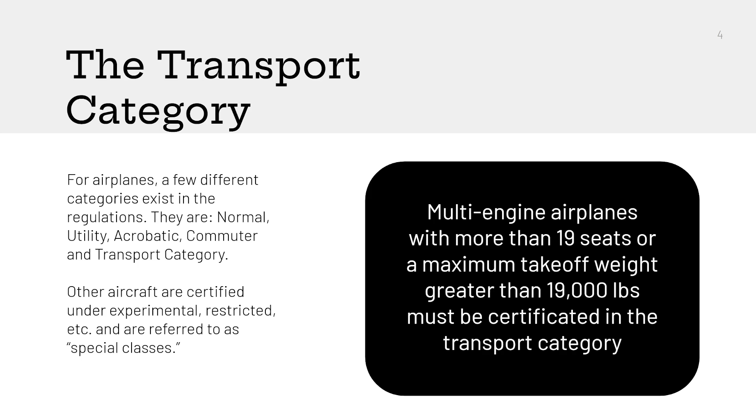So the typical airline transport airplane that you would see follows these guidelines and are certified under the transport category.

So specifically talking about takeoff warning systems itself. If we examine Part 25 and go to 703, this was specifically added to Part 25 around 1978. That was the docket number.

A little bit about it: a takeoff warning system must be installed and must meet the following requirements in order for an aircraft to be certified under the transport category, or 25.

The system must provide the pilots an aural warning that is automatically activated during the initial portion of the takeoff roll if the airplane is in a configuration, including any of the following, that would not allow for a safe takeoff: wing flaps or leading edge devices, such as slats - I think there's also manual flaps in the front in some airplanes - or leading edge devices that are not within the approved range of takeoff positions.

Number 2: wing spoilers, except lateral control spoilers meeting the requirements of 25.671. Speed brakes or longitudinal trim devices are not in a position that would allow for a safe takeoff. And 25.671, I believe, covers devices like flaperons, which is a flap and an aileron. I think the 777 and 787 have those.

But anyway, so you've got wing flaps or leading edge devices, wing spoilers - so those are your ground spoilers and your multifunction spoilers.

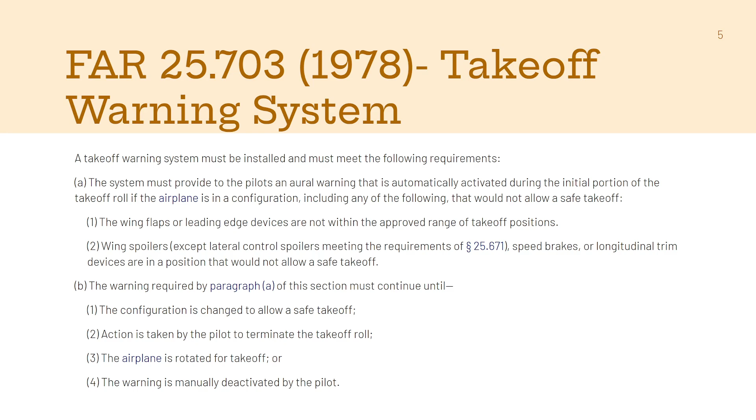There isn't really a takeoff config switch. In my jet, there is a takeoff config switch, but in a lot of the Boeings - I think all of them - you're actually going to initiate the test function of the takeoff config test just by moving the throttle. You want to trigger the system to think you're applying takeoff thrust in that condition, and then it'll check all of the systems.

So the takeoff configuration warning for the 737 is armed when the airplane is on the ground, meaning weight on wheels, and either or both of the forward thrust levers are advanced for takeoff. An intermittent takeoff warning horn sounds if the trailing edge flaps are not set in the flaps 5 through 15 takeoff range - this applies to the 400, 500, and 600 models. The NG is 0 to 25 flaps.

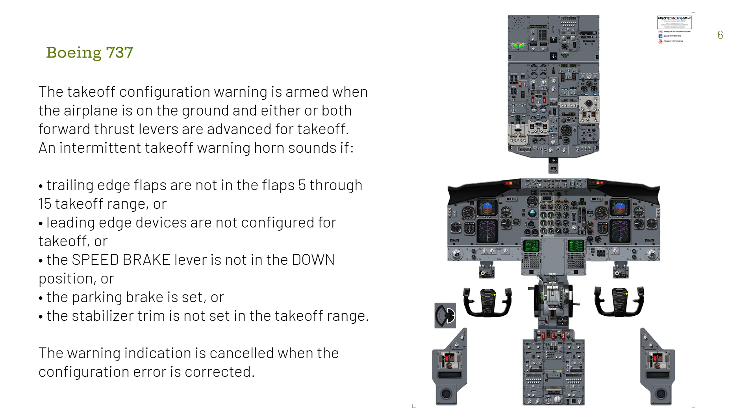It'll check flaps and slats, but also go further. For a more modern airplane with speed brakes, it's also going to check the parking brake and the trims. The warning indication is canceled when the configuration error is corrected - so returning the trim to the green range, or moving the slat lever, or whatever it might be.

So again, a lot of similarities. The 747 has more pairs of landing gear, so that was included in the takeoff warning, takeoff configuration warning.

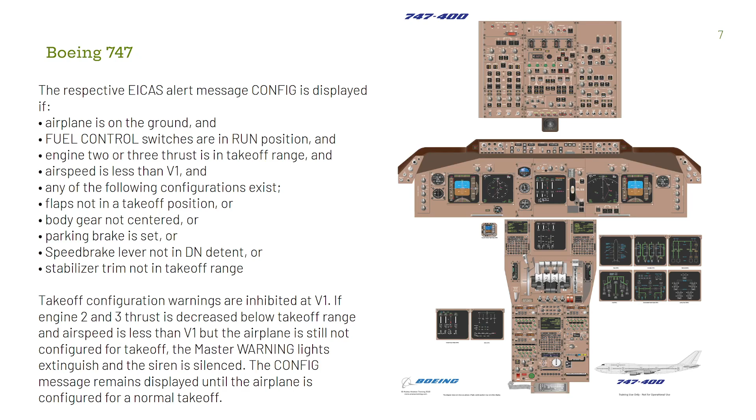The config message remains displayed until the airplane is configured for a normal takeoff, and again, that'll be in the EICAS on display unit 3.

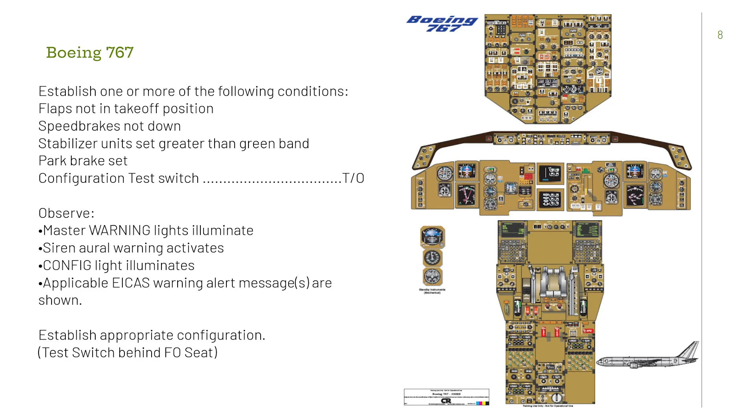Applicable EICAS warning alert messages are shown, again in the center display units. Establish appropriate configuration, and I included that there is a test switch for this specific Boeing behind the FO seat on the right. So there's actually a panel back there that you can use to test the takeoff config warning system.

Let's continue. For the 777, takeoff configuration warnings are armed when the aircraft is on the ground and thrust is in the takeoff range on either engine. Takeoff configuration warnings are also armed when the aircraft is on the ground and the takeoff check switch is pushed. Takeoff configuration warning messages include config doors, flaps, gear steering, parking brake, rudder, spoilers, and stabilizer.

So you've got your rudder trim, your spoilers deployed or not seated, your doors not closed and locked and armed, and a number of others there. Stabilizer trim, just like on the other aircraft.

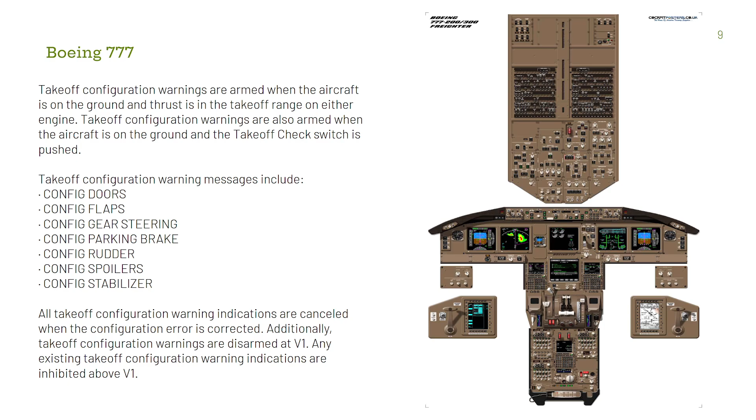All takeoff configuration warning indications are canceled when the configuration error is corrected. Additionally, takeoff configuration warnings are disarmed at V1. Any existing takeoff configuration warning indications are inhibited above V1.

Either engine thrust is in takeoff range - again, you're advancing the thrust levers forward. Thrust reversers are not unlocked or deployed, and airspeed is less than V1.

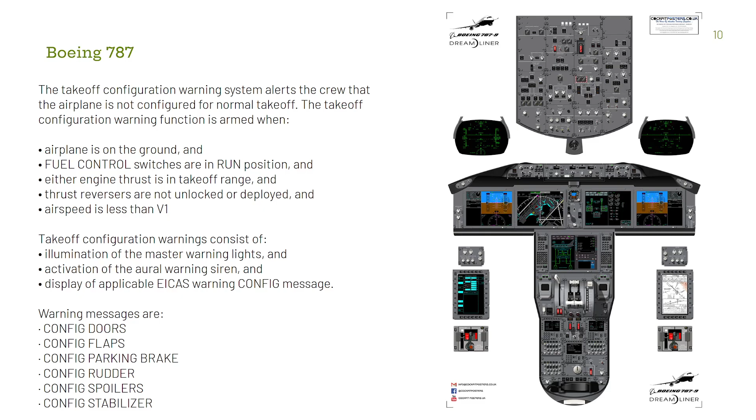So kind of similar to the 777. We've got config doors, flaps, parking brake, rudder, spoilers, and stabilizer. So those are all checked through that switch.

Now we're getting into Airbus. From my research in the manuals, they have quite a bit of other things that they check, which is probably a good thing. When the takeoff config push button on the ECAM panel is pressed by the crew, it simulates the application of takeoff power. If any of the following parameters are not met, the associated ECAM warning message will appear.

So that means you push this button before takeoff. It's probably in the before takeoff checklist if it's anything like the E170. The takeoff config push button is actually going to be right down here. There's these four thumb switches here, and then you have a dimmer on the left, and the second one over from the right, or from the left rather, is the takeoff config push button.

So that's going to run its test by simulating in the system logic that takeoff thrust is being applied, and it's going to check all of these things: rudder trim, pitch trim, flaps not in takeoff config, speed brake not retracted so deployed, slats, left and right side stick - so if your fly-by-wire has a fault message - door, so that's all of your passenger doors sealed or locked and armed.

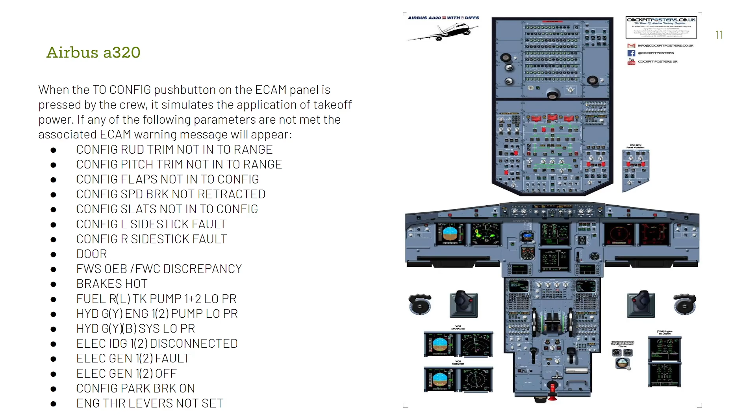So if you're advancing the thrust down here, there's a detent that you have to leave it at, which would be takeoff or go around. And if it doesn't make it there, if it doesn't quite make it there, if it goes past, then you'll get the ECAM message, engine thrust lever is not set, right? So something is wrong with the thrust lever angle, that it is not set for takeoff power, right?

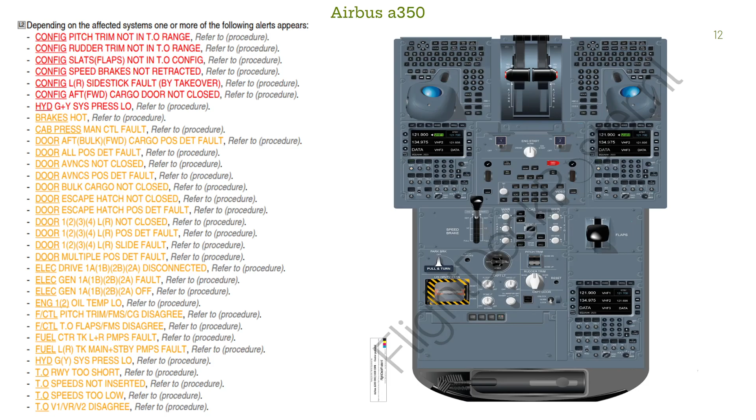So takeoff data, V1, VR, and V2, that would be a big one.

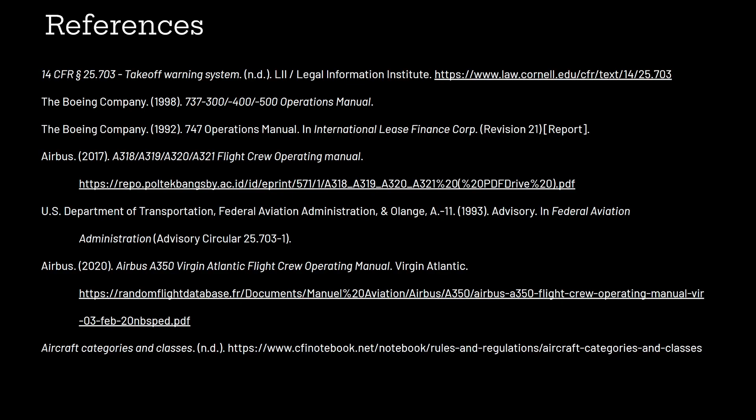And yeah, that's it. So here are all the manuals, and I used an AC in there for some of it. And I've got an A350 manual from Virgin Atlantic, Boeing Company 98, 92 for the 737, 300, 400, 500, and 747. Interestingly enough, the A318, 19, 20, 21, those are all the same manual from Airbus in 2017.

And then LATAM Airlines Group, I got my 767 manual from them. Continental also had the 777, I believe. And yeah, that's it. Thanks for listening.